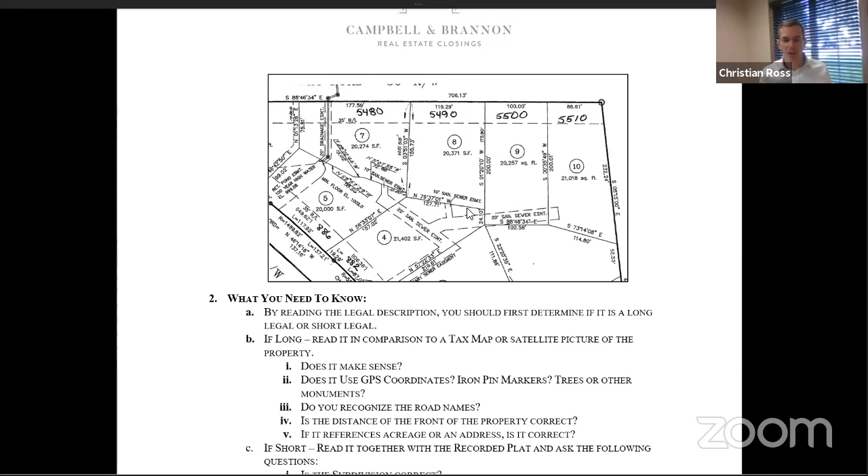So now if you get a legal description, if you're going to reach out to Campbell Brannon, or if you pull it for yourself, you know how to read them. You can at least tell me, is it a long legal or a short legal? Does it seem correct? One thing, if we look back at this long legal, one thing that you notice is that, I'm going to try and annotate here, at the very end of this, the point of beginning is found on Conway Drive. So even if you don't know how to do the coordinates, or you forgot about this class, you know that we're in the right area because that house is on Conway Drive.

All right, point of beginning, Conway Drive. That sounds right. And then when we looked on the next one, Hyde Park subdivision, that sounds right. So you have these descriptors. If you forget everything else, you can know the difference between the long legal and short legal, and you can look for those marked milestones or points of reference. So it'll reference the intersection of two roads. It'll reference a subdivision name. It'll reference the county. Possibly it'll even reference neighboring landowners. And that's how they used to do legal descriptions. We'll get into that a little bit.

But if you're asking me for a legal description, I'm going to do it real quick. I got a lot of things going on. You ask me for a legal description, I send it. I'm not infallible. Sometimes I'll make a mistake. And so I want you to verify, hey, Christian, this is not in Riverside subdivision. This one's in a different county, or this one's in a different subdivision. This is in Governor's Town Square or something like that. So you'll be able to pick that up real quick, as opposed to just saying thank you and putting it into your contract and it being wrong.

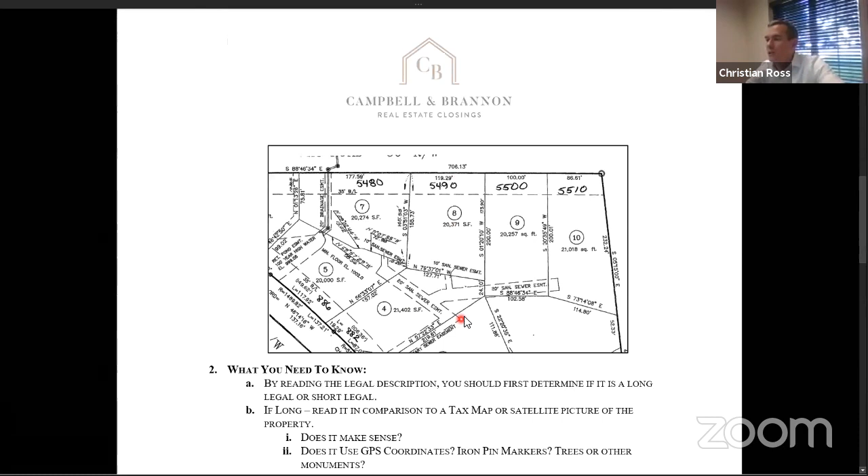So let's keep going down. So what you need to know: by reading the legal description, you should first determine if there's a long legal or short legal. B, if it's long, read it in comparison to a tax map or satellite picture of the property. I do this a lot. It may not be necessary all the time, but does it make sense? At the very bottom, does it say that it's 1 acre? Or, if the shape is a little weird and we go on the tax assessor website, how does it compare? Does it look right? Let's do that right now. So let's see if I can change what I'm going to share here. Stop sharing.

And I'm going to share instead my internet browser, and we're going to go to cobbassessor.org. Now, every county in Georgia has something similar to this. They might just have a different way of getting there. But this is the assessor's website. This is where I spend the majority of my time. And if you're lucky enough to be in Cobb County, this is an incredible website. In my opinion, it's probably one of the better ones in the state.

So let's look up that property. It was 5500 Conway Drive. We go down here, sales information, click here. Guess what I have? I have a legal description. I have a whole warranty deed, and I didn't have to sign in or anything. And if you notice, that's my name. So I'm not trying to divulge any confidential information, but there's my legal description.

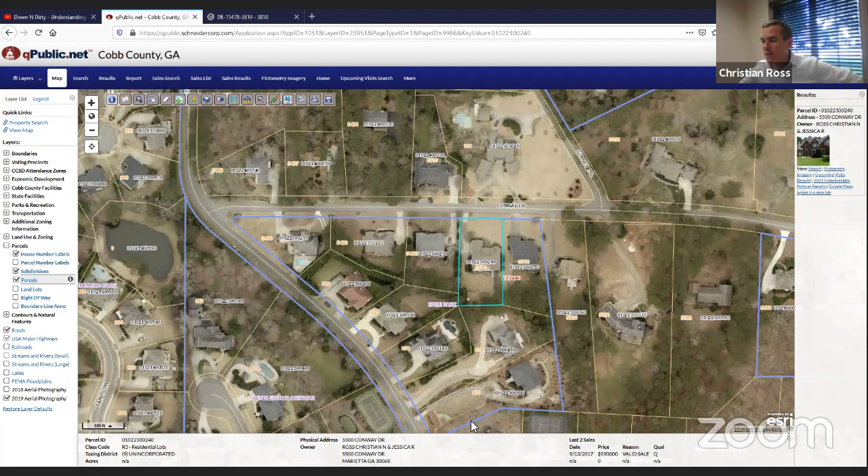You can also add in subdivision maps. So this blue line is our subdivision. Technically I guess it's Hyde Park subdivision, but look, there are other ones. And so here's another subdivision. I think that's St. Leon or Lion or whatever it's called. And then if you go this way, I don't even know my own subdivisions, but I think this is Waterford Green and things like that.

You can also do what we talked about before, which is boundaries. There are districts, cities, Senate districts, voting districts, economic development. Let's see what that is. Enterprise zones, probably not going to see those around here. Parks and recreation. This is kind of a neat thing to have on here because there are a lot of parks in this area. So you'll see like Gold Branch, Chattahoochee River National Recreation Area. So you can have a client just looking around on this website. If you're not familiar with the area or they're not familiar with it, it's a really neat resource for you.

So let's go back to my handout. Okay, so you look at your long legal, does it make sense. You compared it to the GIS map. Does it use GPS coordinates like the degrees, minutes, and seconds? Very specific. If you notice on the legal description, it was like 100 feet. This one was 200.01 feet, and this one was 102.58 feet. So is it really specific? It is. If it is, that's great. That means scientifically we know exactly what our property lines are.

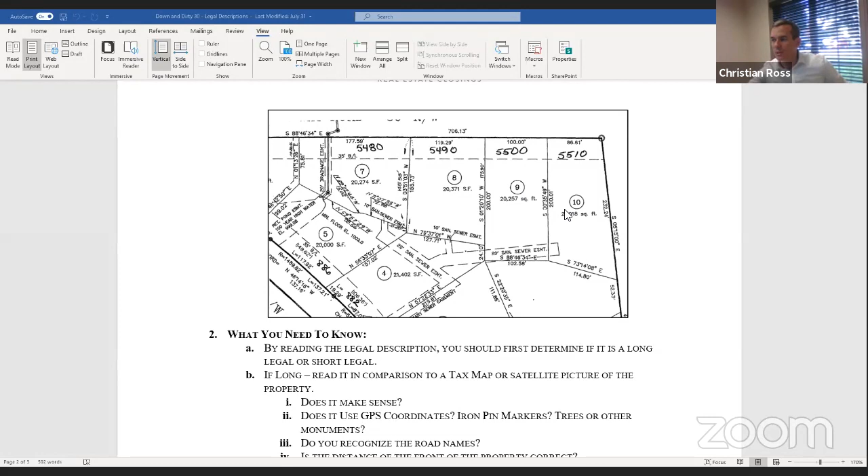There's no reference to fences. There's no reference to pools. I think one of these houses does have a pool. I think it's off to the corner or something. So you'd get a survey to verify that the house was put in the right place, that it was put within the building lines, the setback lines, things of that nature. So that's why you get a survey. You may also get a survey to verify that you can put new additions on.

So maybe you're trying to verify that something in the future could be built there. So there are 2 ways you'd get a survey, and we actually are going to have a class on that in the future. But to verify that there are no existing encroachments, no existing title issues. But 2, to verify that you could include or build any future additions to the property.

You also, this is a big one, and there have been some really wild lawsuits about it. You may not be able to just pull the legal description from the county records. The seller may have bought this vacant piece of land, then they did a plat, they subdivided it, the county approved it, and now they're selling off lots. You can't use the vesting deed, the legal description. We have to create a new one. Or if the builder owns 100 lots, you can't just use the legal description showing all 100 lots. You have to break it down to just being 1 lot.

So in that scenario, you can take the format and you could actually create your own short legal description if you had a plat. It's really pretty easy. You pull all the information from the plat, put in your legal description. But honestly, I would reach out to an attorney and I would just make sure that they help you or verify it. More eyes on it is probably better.

Pam says also things may have changed since it was built. Survey is important. Yeah, you're 100% correct. So the big issue is that the survey shows where the house is in relation to the property lines. Let's say you had a 20-year-old survey that shows the house on it. Well, 20 years, there's a lot that may have happened. And maybe not even your property, but all the neighbors have been changing ownership. They maybe put in a fence or they put in a pool, things like that. We just want to verify. It's better to know now before we buy the house than afterwards when we've already paid the money for it.

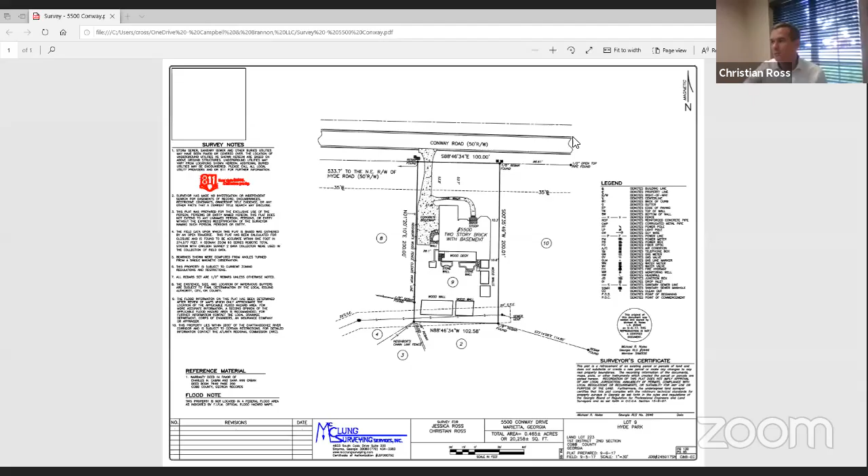So I told you that this was my house. Here's the survey. So I got a survey from McClung Surveying. I think Jeff McClung is one of the best. I know they're not the cheapest, but they do a great job. So this is my survey. This is not recorded of record. I paid for it. And they came out, they sent a whole team of people actually with their survey equipment, and they basically have two pieces of equipment.

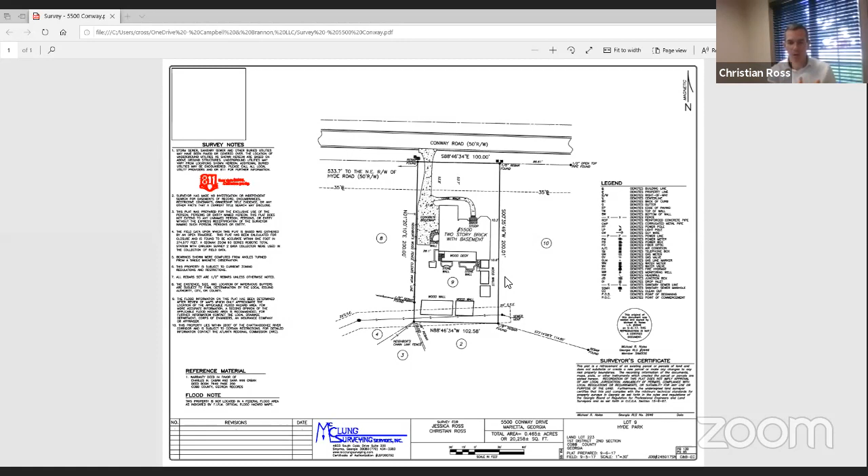The first one is a metal detector, and it tells where all the pins that are buried underground are so they can find them. There's iron pins or like little rebar pins that they'll bury into the ground. And then they use the thing that you're probably used to seeing, which is kind of like their laser or their distance marker, where they can go from one distance to another and know exactly how far it is, what coordinate it is, and whether anything is in the way. So encroachments.

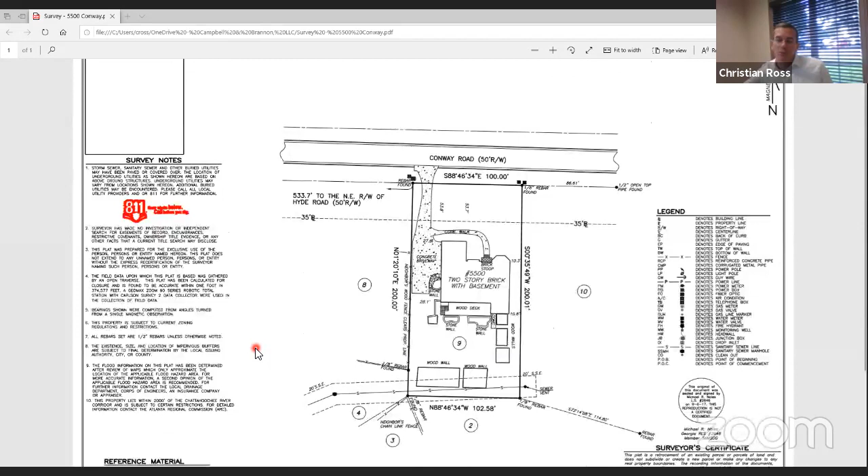So when I pull this survey, first you have your legend off to the right here. Let's see if I can spotlight things. So here's our legend off to the corner here. It's showing who did my survey. They're certifying that it was done with certain technology or certain equipment. They referenced the deed where they pulled the property lines from. And they also reference the flood note. The property is not located in the federal flood zone as indicated by FIRM, Official Flood Hazard Maps. There's also going to be another class on flood zones, so we'll have that coming up.

I love reading these survey notes. They're written there for a reason. I used to build subdivisions and I would ignore the notes, and that's where all the good stuff is. The good stuff isn't always on the actual drawing of the property. A lot of times it's in the notes. So let's look at the notes real quick. Storm sewer, sanitary sewer, and other buried utilities may have been paved or covered over. Location of them is an estimate, and you should call 811 for more information.

If you are worried about whether there are easements in the backyard and your client refuses to get a survey, they can't afford it, or maybe they're just in their due diligence and they don't want to spend all this money on a survey, call 811. Call 811. Tell them that you want to verify any easements, any utilities that are running in the backyard, and they'll come out for free and mark it.

They'll say there's a gas line. They'll say there's sewer line. They'll say there's water. They'll mark it right there. It washes off in a week or two. I had a closing where the survey showed an easement in the backyard, and they called it a general utility easement. And the seller claimed that there was nothing in there. There's nothing in there.

And I said, well, you can't build a pool over an easement, especially one that has something in there. Maybe you could talk to the county if there's nothing, but the best way to know is call 811, and they will send someone out to verify that there's nothing in there. I can't confirm that you would be able to get a permit from the county, but you might.

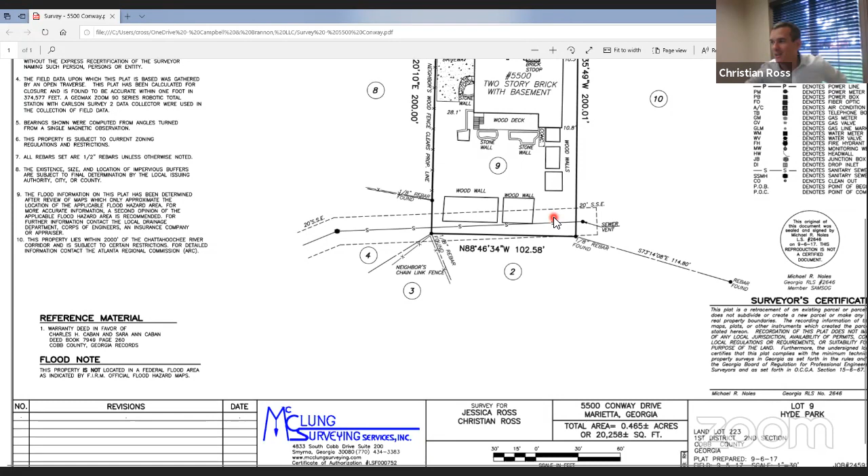Luckily, I didn't want to really build anything on the house, and I'm not subject to an HOA. Hyde Park isn't an active HOA, so it's nothing I have to worry about in that regard. But maybe if I wanted to build an extension or something on the back of the house, I might have to get Atlanta Regional Commission approval. Man, my mind is blown. So, hey, there we go. Read your survey.

So now that we have our survey, this is how you read it. This is your point of beginning. So Larry mentioned earlier, where's the point of beginning? They actually reference it, 533.7 feet to the northeast right-of-way of Hyde Road. So that's northeast right-of-way of Hyde Road and Conway. That's your point of beginning. Come 533.7 feet to a rebar found. You see it right here, a rebar found.

And then south 88 degrees, 46 minutes, 34 seconds east, 100 feet to an 1/8-inch rebar found. And then come on down southwest, 200.01 feet to another 1/2-inch rebar found. And then we go another 102 feet, and then we go 200 feet up along there. Neighbor's wood fence clears property line. So that's not an issue. I don't really worry too much about fences anyways. There's some wood walls that they've referenced.

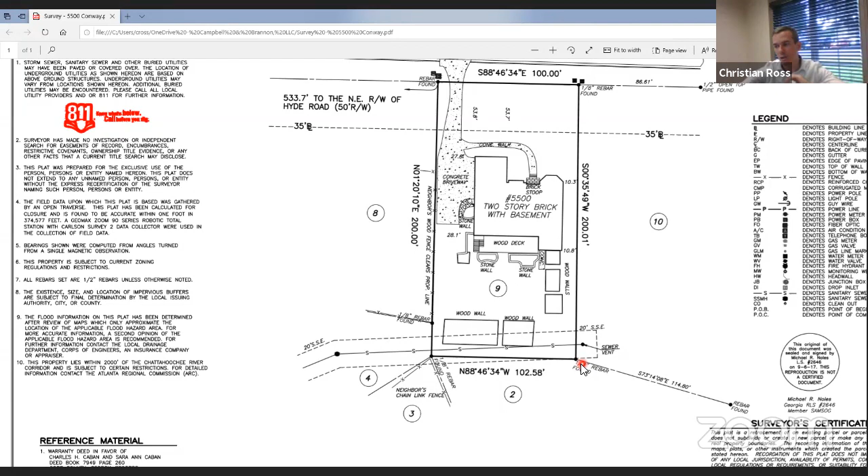Here's that sewer easement that we saw on the plat. So the surveyor is noting it there. They showed that there was a sewer vent that's basically on the neighboring property, but they're trying to show it. This is why I think McClung is one of the best, because they go a little bit beyond. They'll go and look at the neighboring stuff, anything that could affect you or be helpful to you. They're going to put it on the plat, whether it's on your property or not.

And then they have a description of the house. We're always going to look at the driveway. If this driveway was over the property line, that'd be a problem, obviously. It has a walkway, it has the house, all that stuff. It also will show this 9, which was the lot number. So, and we've got that.

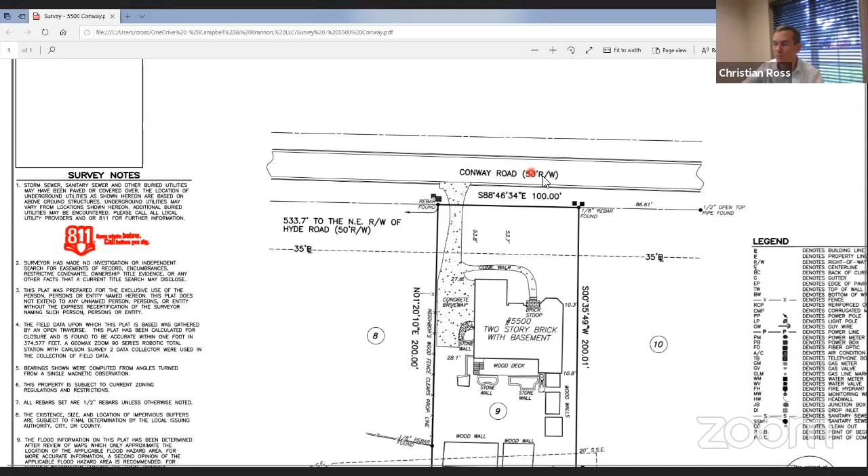It's showing Conway Road, 50-foot right-of-way, which we would have seen on the plat if I'd shown you the full thing. And then the last thing is the 35-foot building lines. You can't build a house within 35 feet of the right-of-way, which is very helpful.

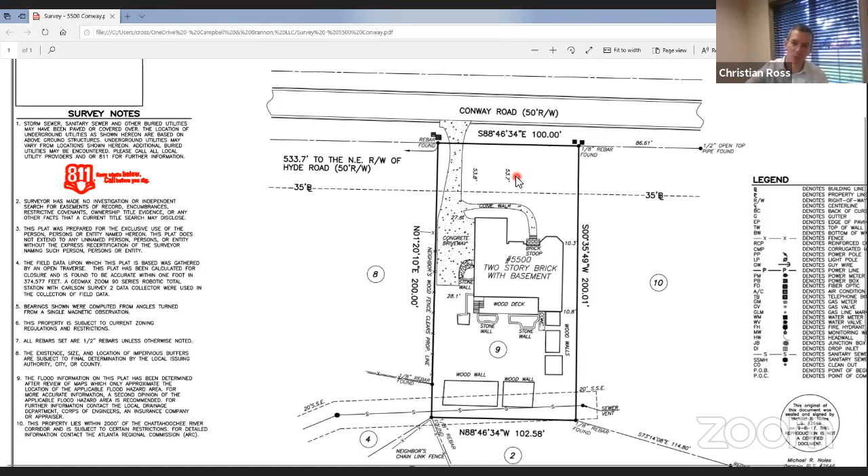Now, the thing that's changed since I bought this house is I put in a fence. So if a new buyer were to come along, I could give them this survey, but it's not going to show where the fence was in relation to it. That would be up to the buyer as to whether that's a risk to them or if they're okay with the way it is. When they built the fence, they did call 811 and they came out and verified what utilities were in the right-of-way, and we went from there.

But I hope that was helpful to you. There's a lot of things on here that I think is great. What they're noting down here is the total area, plus or minus just under a half acre, or 20,000 square feet. It has an address, and then on the very bottom here - let me see if I can move it over - you've got your land lot, your district, your section, Cobb County, Georgia, plat prepared date, all that stuff.

And this is the plat book 130, page 65. So if you notice something that was wrong on here, you might look at this plat book and page that they pulled the information from and say, wait a second, they're not using the newest plat, or they're using an old one, something like that. And you could actually get your survey corrected. So just like an appraiser can make mistakes and may be willing to update it or change it based on your feedback, I do this a lot of times too.

If I see something that doesn't match what's on the tax map, doesn't match what the seller knows to be their property - what's going on here? We could look at the plat book and page. I hope that was helpful.

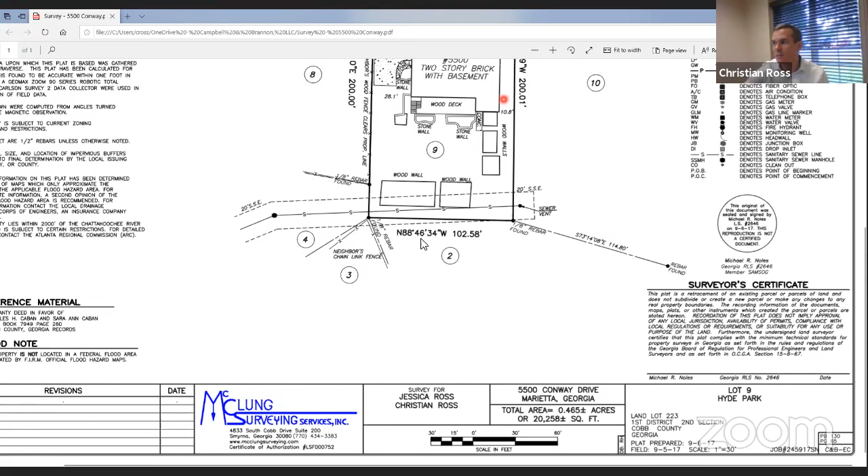I think this is a really, really important topic. It's not that difficult, but it does take reps. One of the benefits of being in my job is that I get to see legal descriptions maybe 100 times a day, and people are asking me questions about them. So I really have to get into the details, and you can too. You may not have as many reps - it may take you some time to get into it, but it's really not that difficult to get comfortable with.

Just again as a summary: is it a short legal or a long legal? Can I find any sign of markers or reference points that make sense to me? The Conway Drive thing, the subdivision name, the county where it's recorded. Let's verify it to the plat, let's verify it compared to the survey. So we're showing pretty much everything is adding up, except that long legal that Larry mentioned that is missing a point of beginning.

So if you only had a long legal, we'd probably have to fix it. We'd ask the seller for a survey, or we'd go back in prior deeds and verify it. Honestly, the missing point of beginning is because I missed it, right? So if I can miss it on my presentation to you guys, I can miss it on a closing, or another attorney could easily miss it. We're not perfect, right? So we verify - trust but verify - go through the process. If you have questions, have a second set of eyes, call me directly, and we go from there.